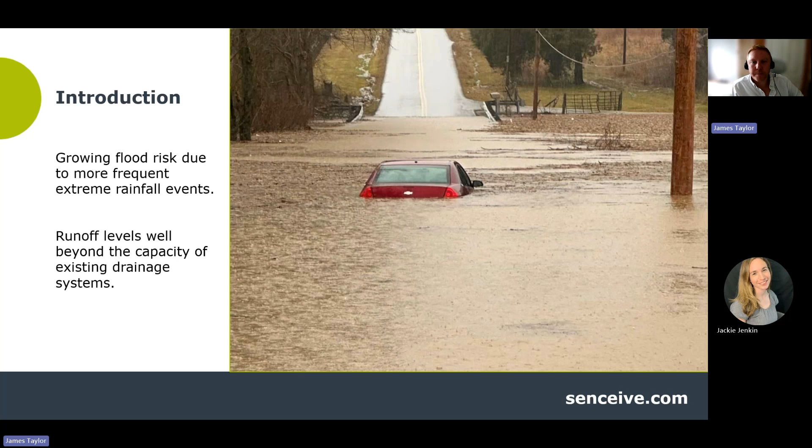Transport infrastructure and urban areas worldwide face growing flood risk due to more frequent extreme rainfall events. These can cause surface runoff levels well beyond the capacity of existing drainage systems. Failure of a drainage system can have safety and financial implications for infrastructure operators and national governments. These can range from delays in cleanup operations caused by floods to major earthwork failures and water damage, destroying infrastructure and endangering lives.

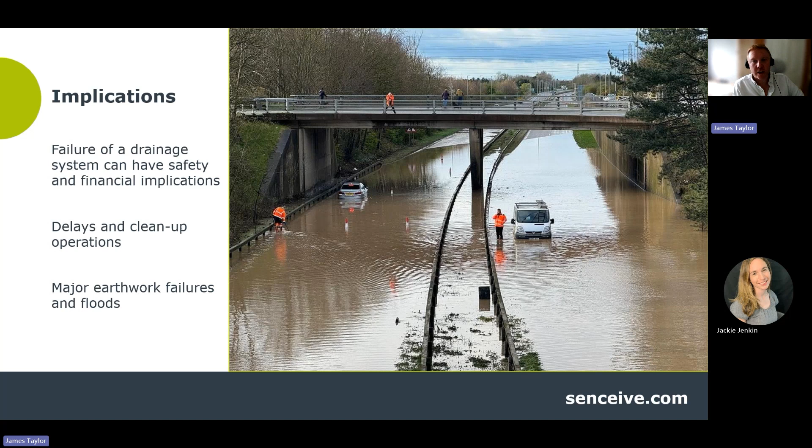Record-breaking global temperatures in 2024 translated to unprecedented downpours across continents, impacting regions from Kathmandu to Dubai and Brazil to the USA. In Central Europe, early warning monitoring systems demonstrated the critical role of preparedness in saving lives. Advanced warnings allowed evacuations, road and rail mitigation measures, reservoir adjustments, and flood defense activations, reducing fatalities to fewer than 30 despite record rainfall. In stark contrast, floods in Sudan, Nigeria, Niger, Cameroon, and Chad, where early warning systems were lacking, claimed the lives of 170 people and displaced millions.

Together with slope angle, soil type, and vegetation cover, elevated moisture content is a primary causal factor in earthwork failures. Increasing moisture content increases soil weight and reduces shear strength and cohesion. A review of 670 Highways England earthworks failures between 2003 and 2014 found that 74% of failures had some drainage problem.

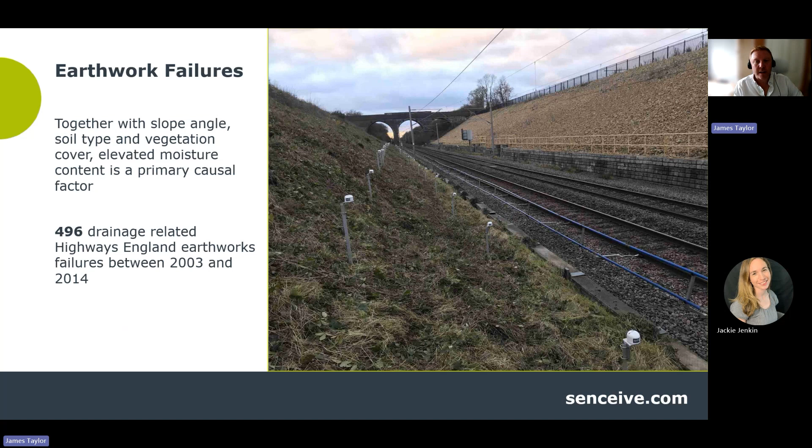Here is a cut from our slope monitoring application. As can be seen in the video, Senceive is the world's most widely used remote monitoring solution for near real-time alerts of landslips, rockfalls, and earthwork failures. With drainage playing such a significant role in these failures, effective drainage monitoring adds a further tool for engineers to prevent and mitigate these failures. The drainage application can be added to existing and new slope deployments.

Drainage engineers want confidence that their drainage system is working. As site conditions can change in a short sub-hour time frame, there is a need for frequent or continuous data updates, with automation of systems key to triggering alerts if thresholds are breached. Smarter, wireless management of these systems - drains, catch pits, channels and culverts - gives them the long-term data trends they need to confirm system health or initiate reactive mitigation if thresholds are triggered. This protects the integrity of structures, earthworks and slopes, allowing safe and efficient management of the infrastructure that they support.

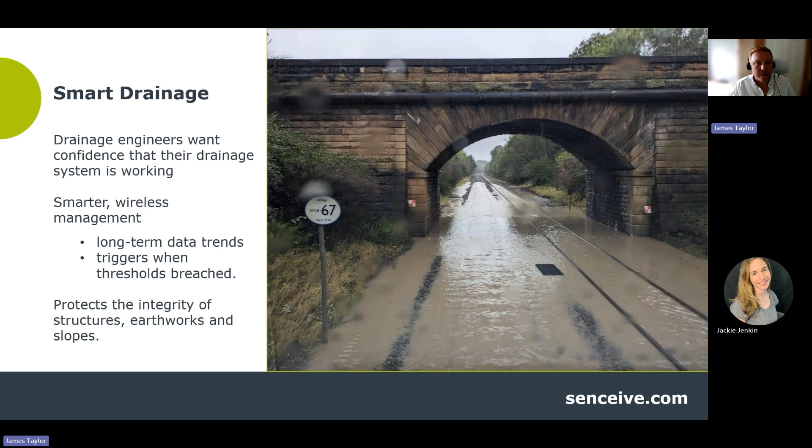Senceive's wireless solution is based around the new water level monitor, with a mix of other integrated support sensors that give clients an overall picture of their drainage system health, offering long-term data trends and reactive triggers.

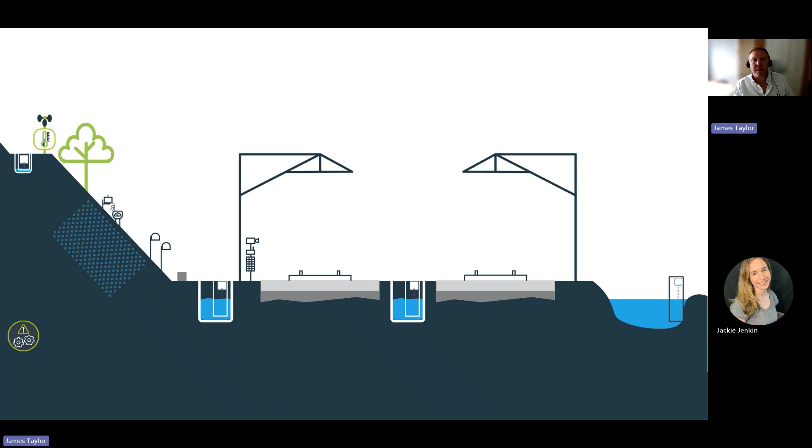Rainfall monitoring for localized precipitation data. Long-term analysis can inform how much rainfall the system can take before flood events occur and their frequency. Intensity levels can trigger alarms for immediate reactive measures, such as preparing flood defenses.

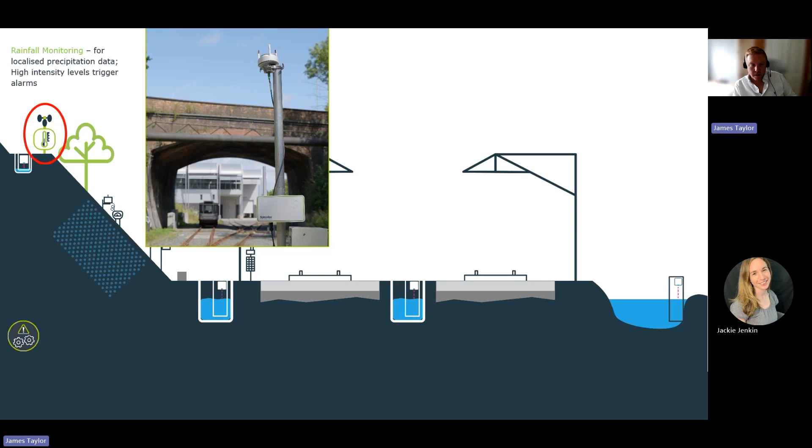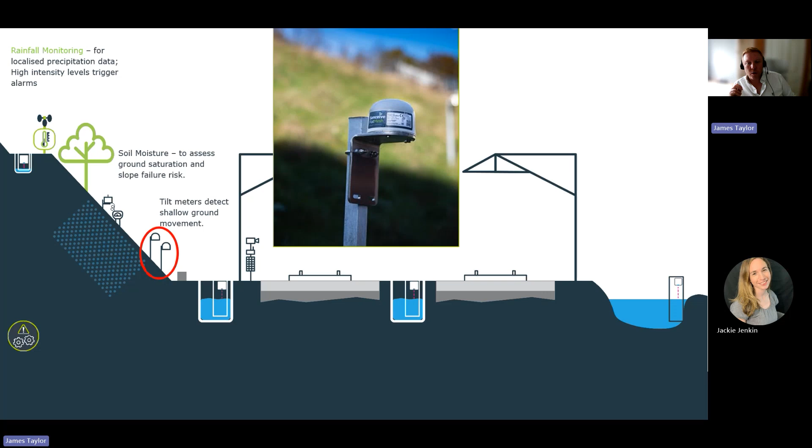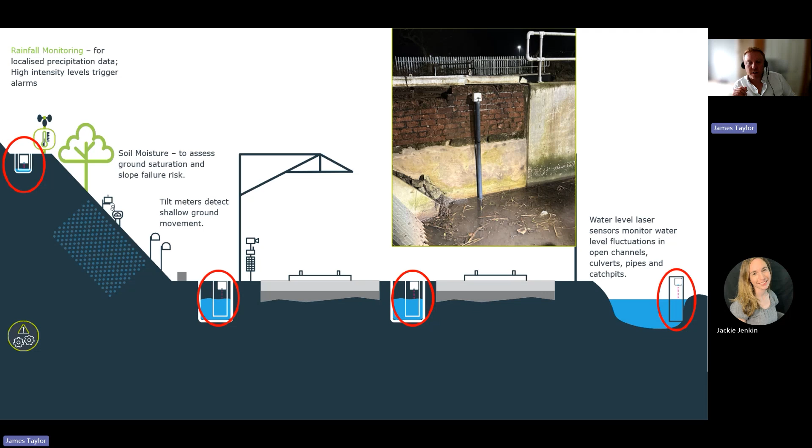Soil moisture sensors to assess ground saturation and slope failure risk. Where risk is found, tilt meters can be deployed to areas repeatedly saturated to detect and protect against shallow ground movement. Water level laser sensors monitor water level fluctuations in open channels, culverts, pipes and catch pits, triggering if client-defined threshold levels are breached.

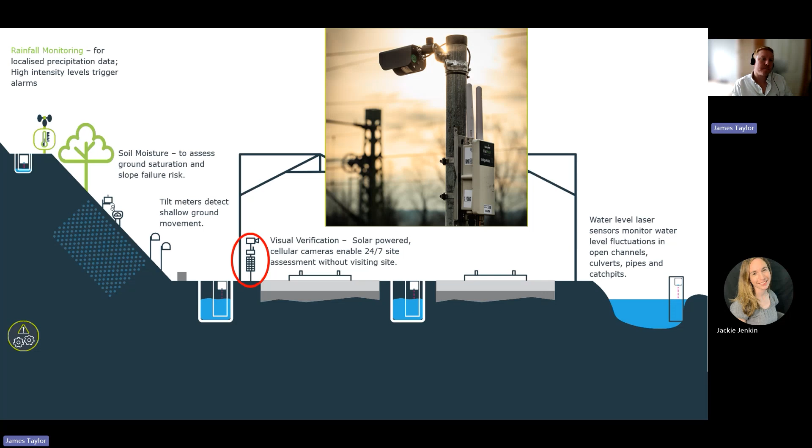Finally, visual verification. The solar-powered cellular cameras enable 24/7 remote assessment without visiting site. Immediate alerts for fast decision making. Trends for long-term data analysis: rainfall versus water level versus soil moisture. Solar-powered cameras and cellular gateways for remote sites. Dynamic sampling and reporting - InfraGuard intelligent monitoring technology adjusts to changing conditions. Integrated solution, so one platform can monitor flood risk, slope failure, track geometry and structural deformation, long sensor battery life, and high quality camera images.

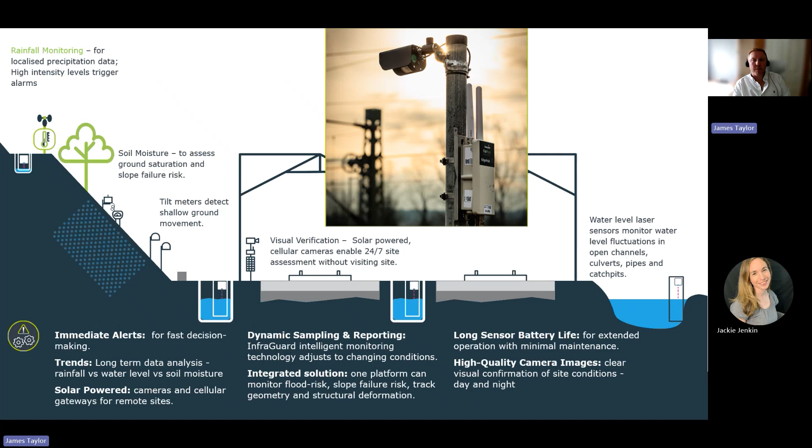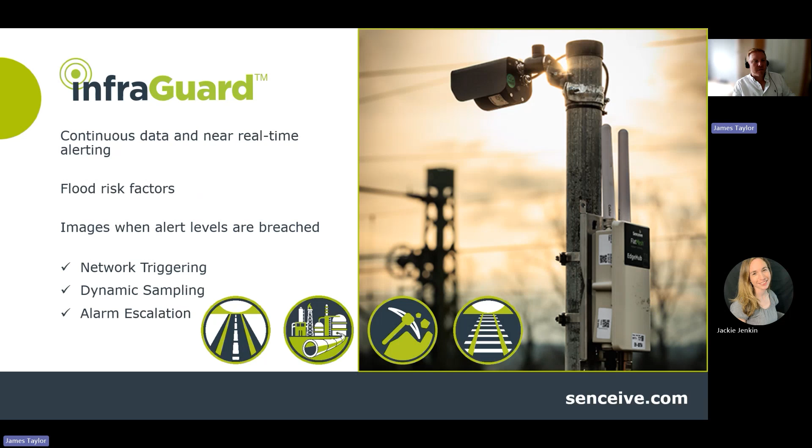Senceive's drainage solution, harnessing InfraGuard, provides continuous data and near real-time alerting for key flood risk contributors within the drainage infrastructure. InfraGuard's network intelligence will produce images when alert levels are breached, showing clients up-to-date site conditions with network triggering, dynamic sampling, and alarm escalation.

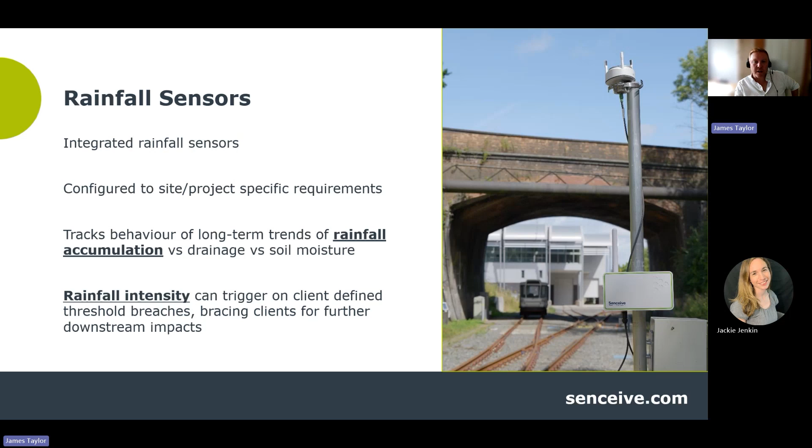Integrated into the drainage application are rainfall sensors that can be configured to site or project-specific requirements. Accumulated rainfall and rainfall intensity are the two important factors. Accumulated rainfall for long-term trends, tracking the amount of rainfall versus drainage versus soil moisture, and rainfall intensity for trigger values when large amounts of rain fall within a short time. This can trigger on client-defined threshold breaches, bracing clients for further downstream impacts such as flash floods in sloped areas or ponding and flooding in flat, impermeable urban areas.

Integrated into the drainage application are soil moisture sensors that measure soil moisture and temperature with research-grade accuracy. They track long-term trends for soil moisture versus water level versus precipitation. Trigger levels can be set to warn of approaching saturation and increased overland flow, identifying areas of repeated saturation and risk.

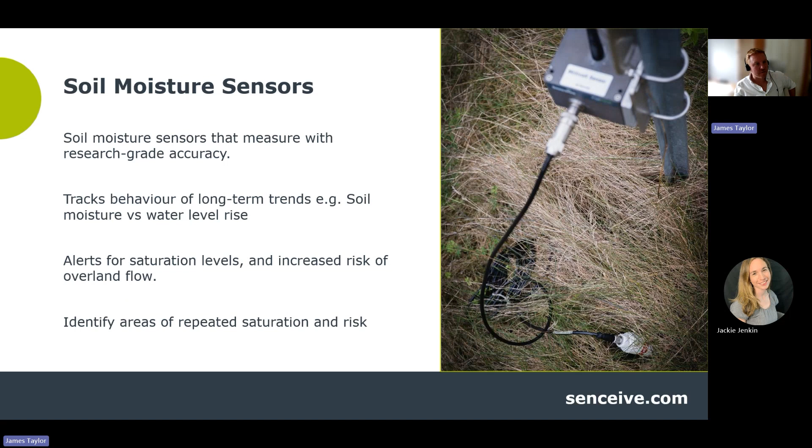In these areas of repeated soil saturation, identified by the system as not draining correctly and at risk of slope failure, you can deploy Senceive's industry-leading monitoring slope solution protected by InfraGuard.

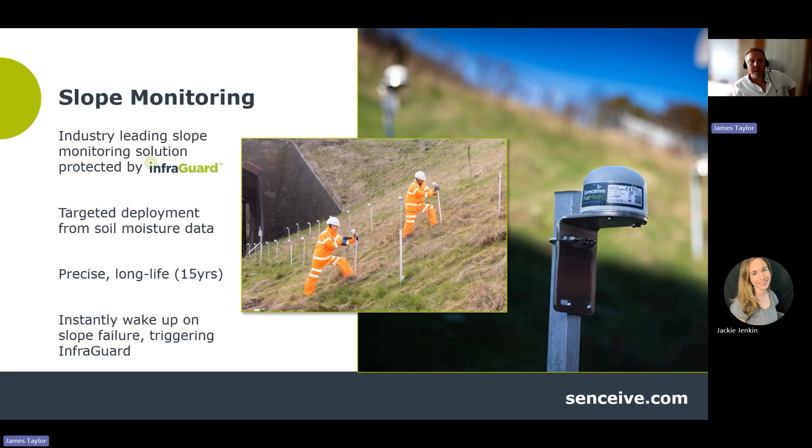Senceive tilt meters are extremely precise, long life, and exceptionally stable 3-axis wireless sensors. They are installed on posts and instantly wake up on slope failure, triggering InfraGuard alerts and images to clients' inboxes or phones.

The water level sensor uses a laser displacement sensor to measure a float contained within a tube. The LDS reads the change in distance as the float is raised and lowered by the changing water level with millimeter accuracy. Deployed upon or within drainage systems, they report on water level change over long deployments, 6 years at half-hourly readings. The sensor is protected by IP68 rating and has a water filter to prevent debris ingress.

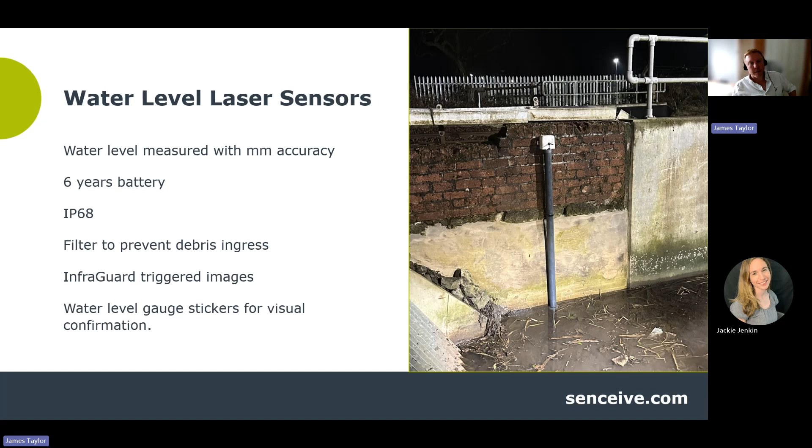When triggered, InfraGuard will generate an image that allows clients visual confirmation against water level gauge stickers on the body of the sensor tube, with further network triggering, dynamic sampling, and alarm escalation. A few of the deployment options follow.

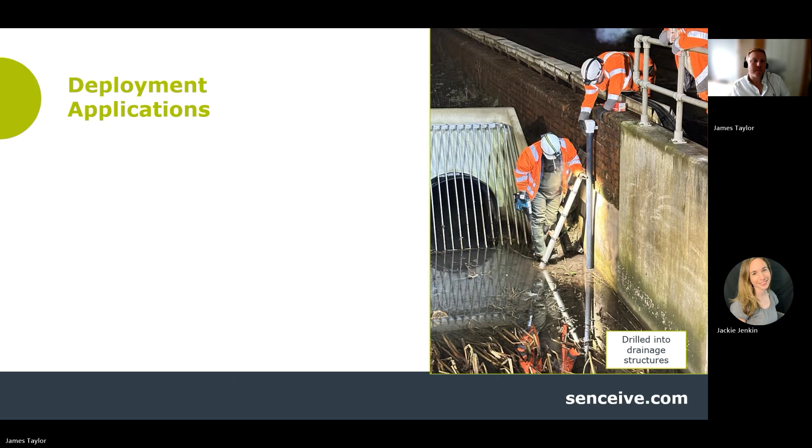As well as the Senceive water level monitor, we have integrated radar water level sensors. These have a longer range, 20 to 30 meters depending on model, and are ideal for attaching to bridges and looking down onto water. Here it is at our test facility hung from a catch pit grate.

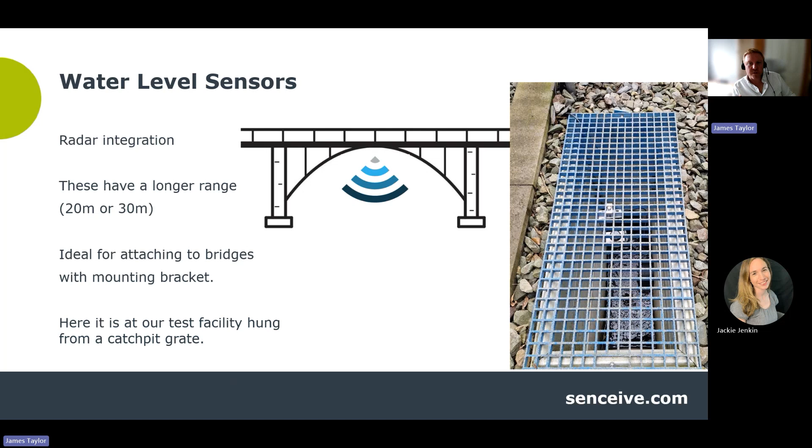The camera alongside InfraGuard is the key to this monitoring application. As the system is triggered by water level, the InfraGuard network intelligence triggers an image. This allows clients visual confirmation against water level gauge stickers on the body of the sensor tube. Clients can also take and view their own photos with the camera at any time outside of scheduled events.

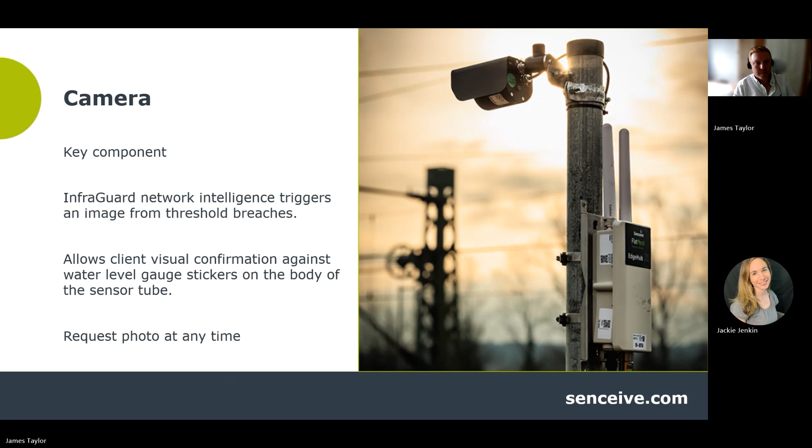Testing was carried out to confirm displacement data reliability and signal strength for below ground installations over a 3-month period. The displacement data tracked water levels very well and was tested against tape depths at intervals throughout the test. The received signal strength indicator was strong and stable throughout testing.

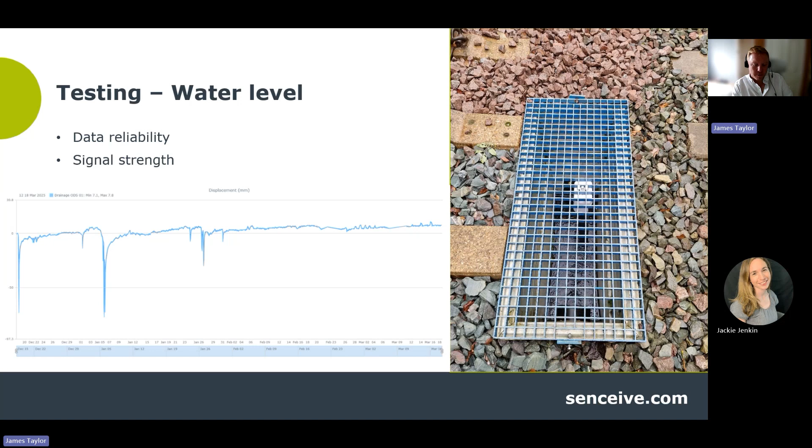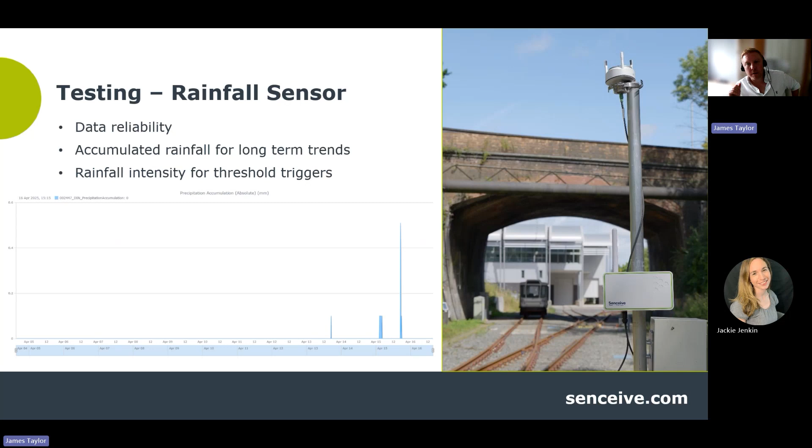We also have rainfall sensors on long-term tests with the last 2 weeks shown here. As can be seen, not many April showers this month, until the bank holiday that was, but the sensor picks it up when it does rain, well below trigger levels.

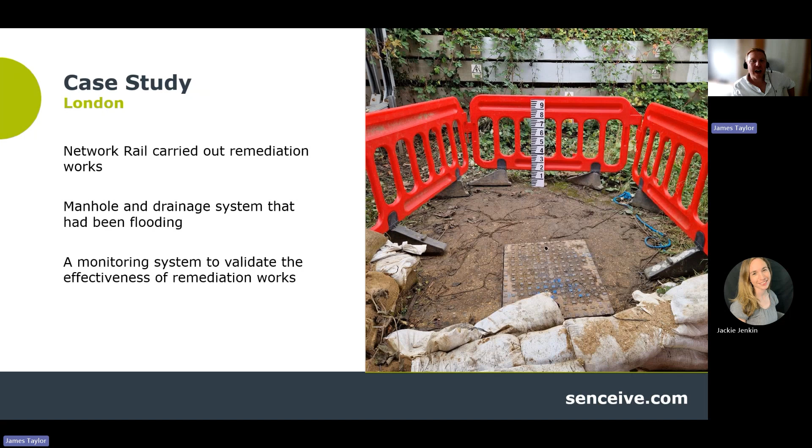The kit has already been deployed in the field with some case studies here. Network Rail carried out remediation works upon this manhole and drainage system that had been flooding in London. They needed a monitoring system to be installed to validate the effectiveness of remediation works, as there is critical infrastructure in the vicinity.

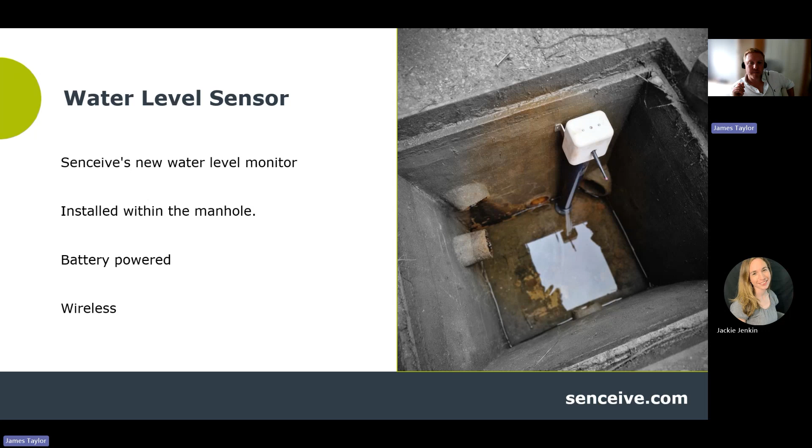Senceive's new water level monitor was chosen to be installed to measure water levels within the manhole. The battery-powered sensor can be installed wirelessly into different difficult-to-reach spaces, such as manholes and catch pits. Network Rail were able to set the trigger levels they require and could then be alerted if water levels exceeded them, using the camera to monitor the situation above ground.

The on-site solar-powered camera was positioned to look down onto the manhole to give a visual check of when or if the manhole was overflowing. A water depth gauge board was also installed to determine external water levels remotely with the camera.

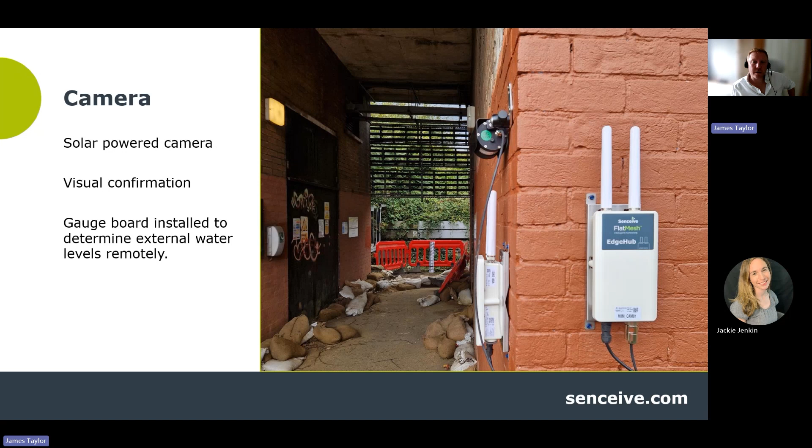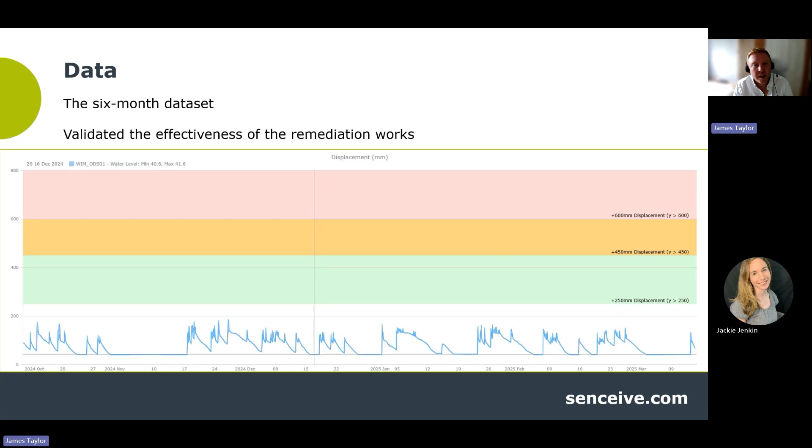Here, another case study from Scotland. A monitoring system was required to confirm the performance of this culvert and to trigger on any flood events occurring. They needed to be alerted when waters were rising past defined threshold levels so that they could monitor the situation more closely with the on-site camera.

Senceive's new water level monitor was chosen again and was drilled into the culvert wall to measure water levels within the channel. The battery-powered sensor can be installed wirelessly on or within most drainage infrastructure, such as retaining walls, giving instant readings on install with 6 years battery life.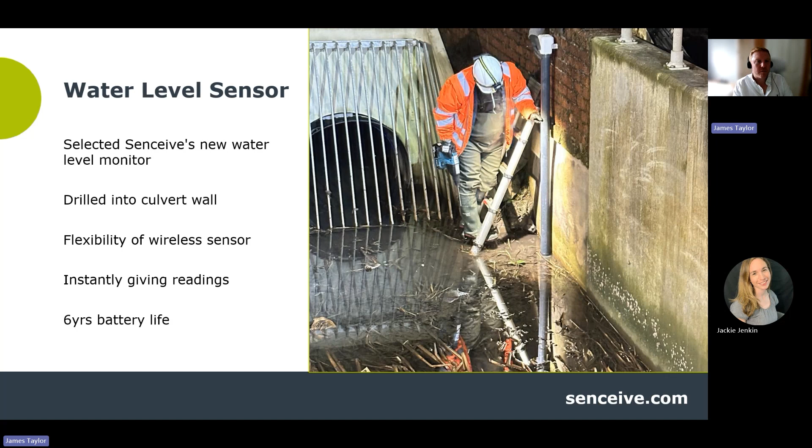Network Rail were able to set the trigger levels they required and could then be alerted if water levels exceeded them, using the camera to monitor the situation remotely. Again, the quality of the camera allows decision making for flood events at any time, day or night.

Asset owners seeking to understand drainage performance and manage flood risk have typically depended on visual, manually measured, or in-pipe CCTV surveys conducted on a periodic basis. This provides data that is extremely useful in revealing parameters such as water level and flow, and issues such as silting, tree root penetration, and damaged pipes.

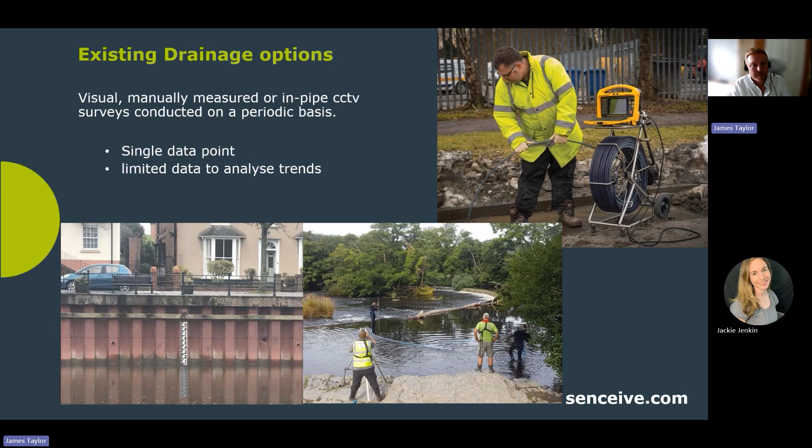The big constraint of such surveys, however, is that they are only valid for a single point in time and offer no data to analyze trends. As site conditions change in sub-hour timeframes, there is a need for more frequent or continuous updates. Remote monitoring has improved reliability and costs over the years to meet this demand, and thus uptake has increased.

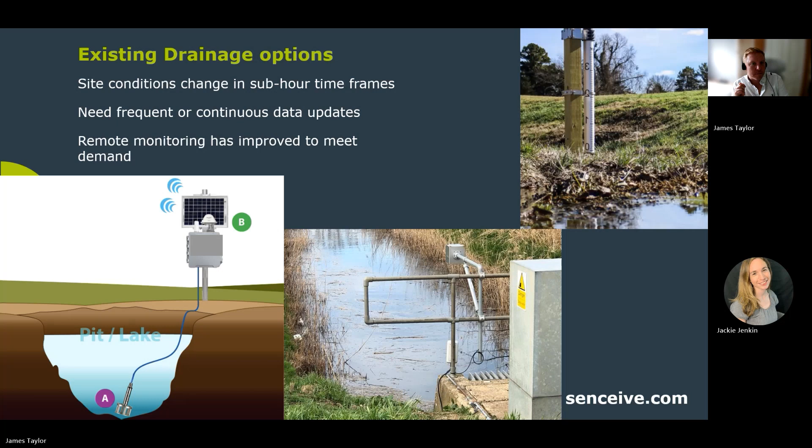Where Senceive fits into the marketplace is the long system battery life and the range of additional integrated systems that can mesh through our interface nodes to give a more complete view of the drainage upon site within one online platform. This is an integrated, complete drainage application, not just a one-off sensor for water level. Further to this, it can also integrate within the network intelligence alongside new or existing Senceive structural, rail, and geotechnical monitoring, enabling a total monitoring solution.

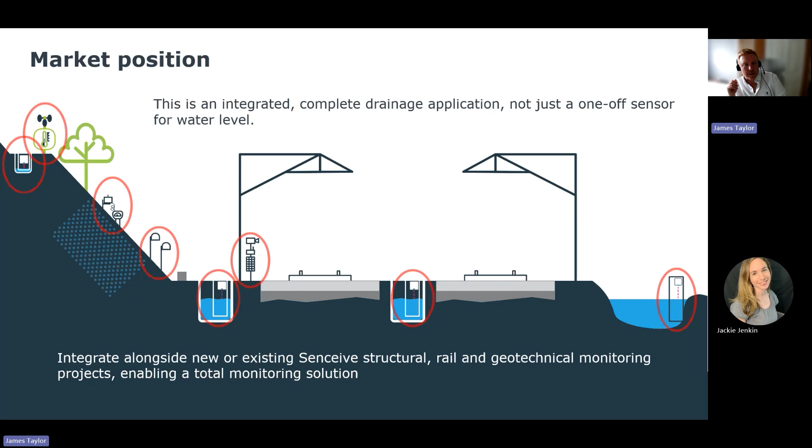Strengths of the system include battery life. This is class-leading battery life, 6 years at 30-minute readings. Camera image confirmation of trigger events and the quality of the wireless solar remote operating camera.

With the interface nodes, we offer the ability to add a range of additional sensors that can give a more complete view of the drainage on site. We can also integrate client requested sensors for more flexibility. InfraGard distinguishes us in the market with all the sensors protected by its network intelligence, creating a complete integrated drainage application and not just a one-off water level sensor.

Finally, product approvals, international certification, and national infrastructure operator ties smooths the way for clients to deploy our systems with minimal friction. Thank you. Any questions?

Excellent. Thank you, James. Definitely a great overview of this smarter management of drainage assets. I'm sure a lot of people will be interested in this with those automated alerts and really clear photos as well. Really interesting. Thank you.

We have a few questions already that have come through. I'm going to read you the first one. Someone has said, can the individual sensors within the application be deployed as standalone sensors?